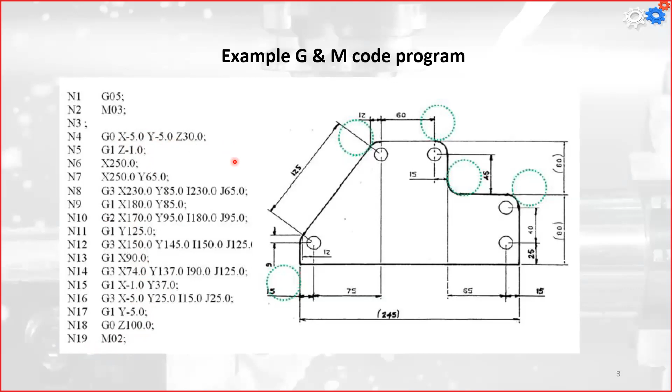While in the case of 3D printing, we do things layer by layer, and thus maybe the same code is going to be repeated multiple times. And that's what we call the canned cycle, especially if all the levels are going to be the same. But sometimes it's also going to have some differentiation between the shapes because we may not have the whole thing moving in the same pattern.

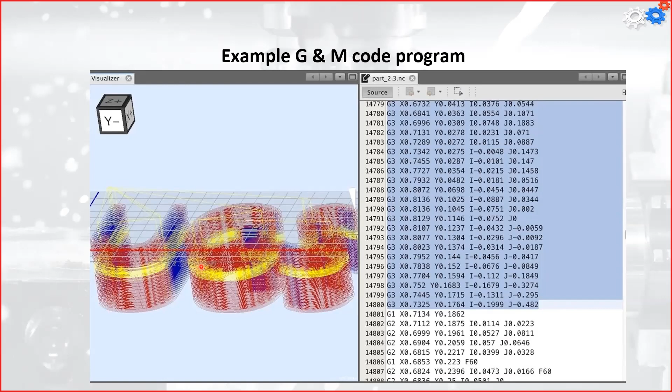Now, creating a numerical control part program. We can do that by manual code writing, and that's what we're going to learn today, and we're going to practice it by Thursday. We need to visualize the machine operation from the drawing of the part.

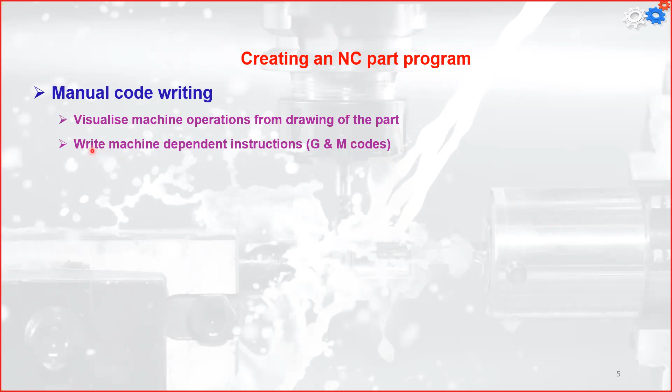So we can either do the part as a 3D part, or if I get to have a physical one and I need to redo it, I will take the dimensions, select a reference point, reference all the points by their location from this reference point as an X, Y, and Z value, and then start to write down my G code manually. So that's writing the machine-dependent instructions by using the G and M code.

You can also use computer-assisted programming. I don't want to explain that to you in too much detail, but this will be high-level languages like APT or EXAPT, compiled into a cutter location file, or CL file. So after writing down the code, we save it as a CL file that will be sent to the machine, and the machine will process it.

Now, the thing with computer-assisted programming: if you ever used a simple programming language like Arduino, for example, you have blocks. And the blocks are about doing a certain operation. So I will import this block, and then I will put P1 and P2, and thus the machine will understand it has to move from P1, which is point number 1, to P2, which is point number 2. And I can also define that this movement is going to be an arc, or a straight line, or just a point going down and up.

So it's mostly going to be something like having already defined things, and making a relationship between these points to get the final shape. If you ever used AutoCAD, it always had this possibility. So I choose a point and I start to move the mouse, and I type LN, which is line, to location XY if I'm in 2D, or XYZ if I'm sketching in 3 dimensions.

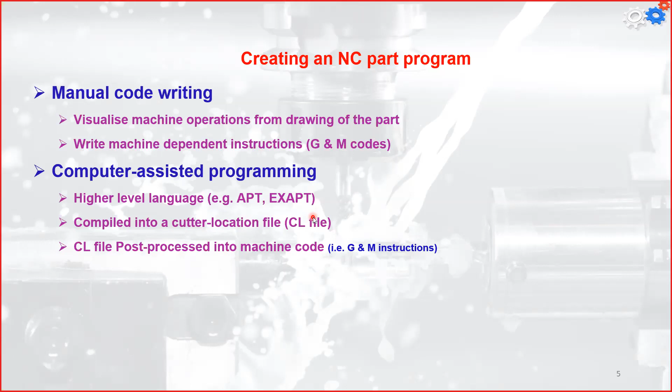The other way is CAD/CAM generated programs, and this is the higher level of writing the G code, and usually it's going to be done by

Do you still have me on Teams? I think I lost Teams. Just give me 1 second. I'm sorry, I lost Teams. I just want to check up with them. Just to start it up. Okay, sorry, Teams people, I lost you. Okay, anyway, I'm going to share the screen again and continue with that. Okay, so I am sorry, but the program just restarted itself. Sorry for that, and we're going to continue with the slide.

Okay, so as I told you, the last thing is going to be CAD/CAM. From the name, we're going to use computer-aided design. When I say CAD, most people will understand that we are going to have the geometry sketched by SolidWorks, or by NX, or by AutoCAD. Now, the term CAD is computer-aided design, which is going to be, of course,

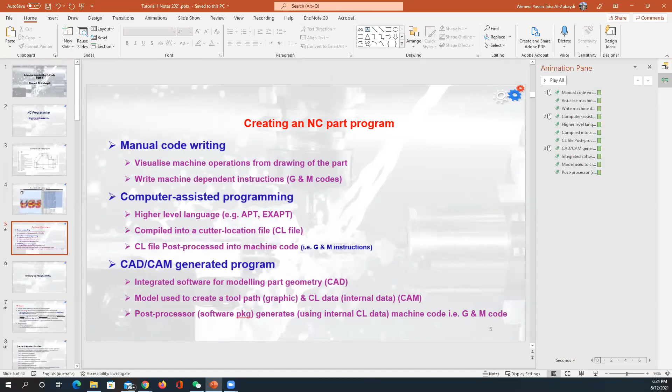Okay, so we go back once again. We said that we do have the CAD/CAM as the last process. What we're going to learn in this session is we're going to sketch the part using SolidWorks, and then we're going to use SolidCAM, which is software available for UTS students, to generate the G-code.

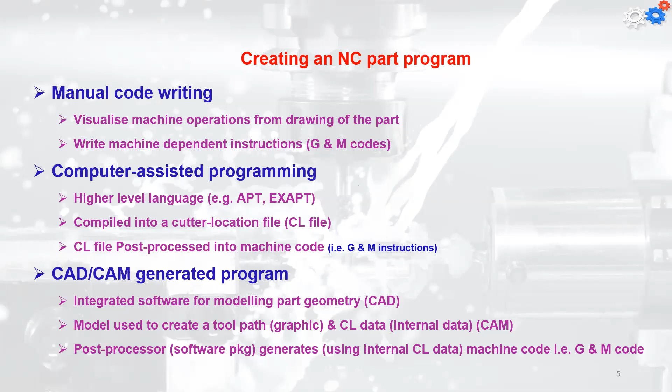Also, I went through the internet and I found something like FreeCAD/CAM, which is a good software, but I'm going to learn how to use it and make a tutorial for you on how to use it. For the first two parts, we're going to use manual G-code writing, because the second one requires a special software that I don't have, and I couldn't find a free copy for it.

We go now with the manual numerical programming. First, we're going to learn about the G-code. I think I can use the camera now. Yeah, now it's much better, you can see me and hear me.

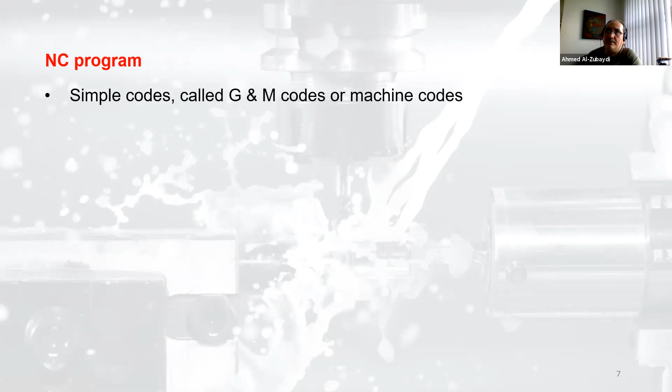Okay, so for numerical programming, we are going to use the simple codes, which are called the G and M codes, or the machine codes. Both names are correct. We're going to run the part program to create the components or the parts of the machine.

What we need to do is just write down lines, multiple lines. Each line is going to send the cutting tool center, in the case of milling, or the tip, in the case of turning, to a new location. It's always required to write down the location of the next point. We don't have to mention the location of the recent point.

The movement of the cutting tool center or tip is called the tool path, and the tool path is defined by the line of code, or block. The line code begins with the block number, defined by N, followed by the G code or M code.

The G code indicates the geometric motion of the tool, which is why it's called the G code. The M code is miscellaneous, or the machine function, like turn on the machine, turn off the machine, or hold the machine, for example to change the tool.

The feed rate usually isn't at the beginning of the code. We set the feed rate with the F code: write down F, then follow it with a number indicating the feed rate in millimeters per minute.

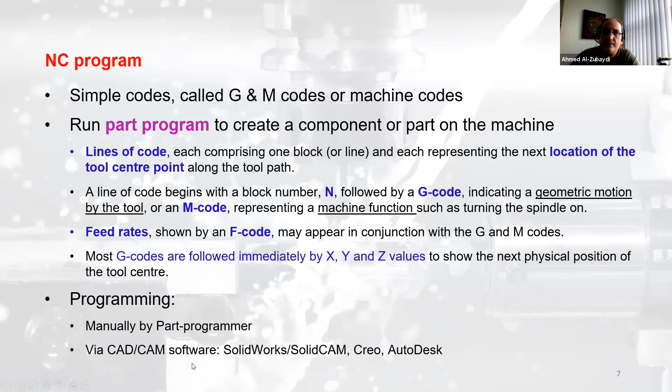The programming can be done manually by the part programmer, or via CAD/CAM software like SolidWorks with SolidCAM, Creo, or Autodesk.

The standard G and M codes number about 90, but you can write a full code using just 5 of them. Well, I want to say 5 or 6, because you can easily remember that.

Everything else, like turning the coolant on or off, or making the offset automatically instead of finding it manually, can be done with codes like G41 and G42. These can be learned individually.

What I'm going to teach you in this session is the basic 6 codes. From these basic 6, you can extend your knowledge, and I'll give you once again the link later for the CNC simulator, which can help you develop your knowledge with G coding.

So we have only a few basic G codes that can do the whole work. Apart from these basic G codes, all the other codes are simply a combination of the basic codes written in shorthand manners, like subroutines or canned cycles.

A subroutine is when I'm doing the main work, then I stop for a while and go do another thing, like make a pocket or a spherical shape, then return back to do the face cutting or profile cutting.

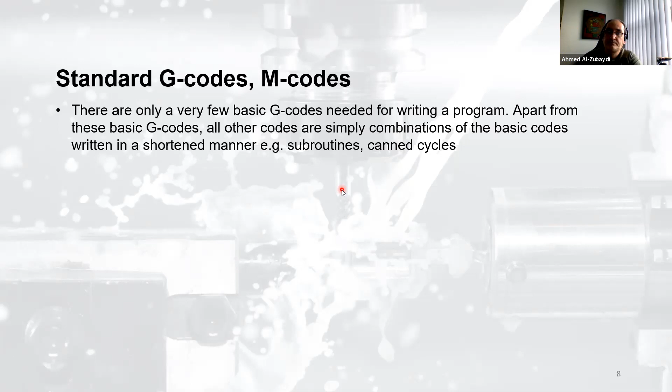The codes we need to learn in general include G90, which sets the absolute coordinates for the machine. By default, all machines are set up as G90. The other one is G91, which sets the incremental coordinates instead.

Now, of course, you remember what absolute coordinates and incremental coordinates are, but we'll give you a brief reminder in the next slides. G00 is a rapid move from one point to another in a straight line without doing any work. For example, if my cutting tool is at this position, I'd like to take it to this position straight forward without doing any work.

No contact between the cutting tool and the work part. Just say G00, X, Y, and Z. When I say X, then I keep the sign for a while—that means you need to put a figure after the X.

The G01 is going to be a straight line move at the set feed rate. That means, once again, it's going to be a straight cut, straight movement, but this time we're going to have contact between the cutting tool and the work part. So we are doing machining.

The G02 and G03 are for cutting an arc shape. The difference between G02 and G03 is that G02 is cutting in the clockwise direction, while G03 is cutting in the counterclockwise direction.

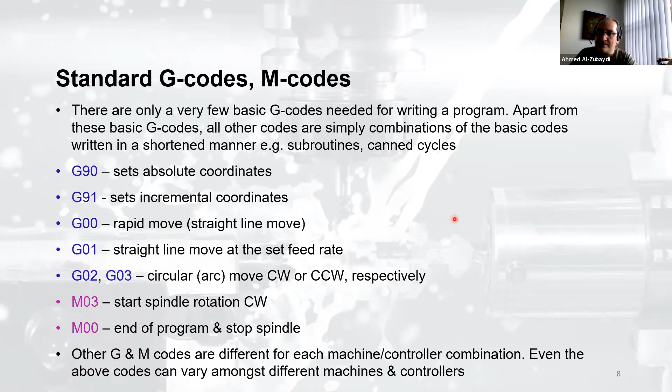Some of the codes mentioned later are G20 and G21, which define what unit you're going to use—either SI units or IP units. Usually all the machines around the world are set up with G21, using SI units. In the United States, they're still using G20, which uses inches and feet.

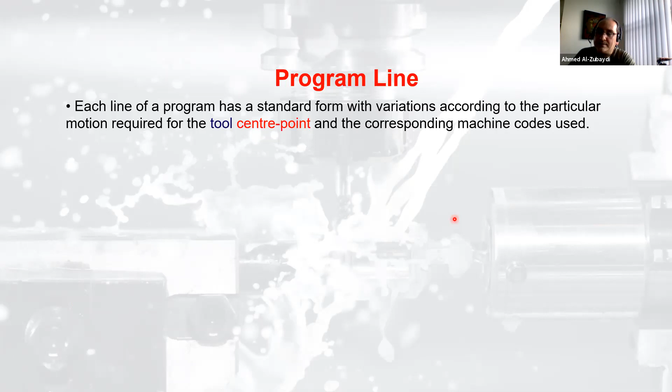For the program line: each line of the program has a standard form with variation according to the particular motion required by the tool center point, in the case of milling, or the tip in the case of the turning operation. Every line, which we call the block, has first the block or sequence number. This is very important because when the machine gives you an error, it will mention the line number, say line 15, and you'll be able to trace it directly. If you forgot to put that, it's going to be very hard to find when you try to fix it on the machine.

Followed by G90, which sets the absolute coordinates. G00 goes in a rapid movement in a straight line to X equal to 100, Y equal to 50 millimeters, Z equal to -1, and F equal to 100. Now you can see that we mentioned the X location, the Y location, and the Z location. Of course, we need a reference point, and this reference point is called the datum point—we're going to talk about this one very soon.

Here's another example: N30, G03, going to X equal to -20, Y equal to 30, I is 10, and J is 2. That was an old method to define the center of the arc when cutting an arc or circle, by defining the I and J location.

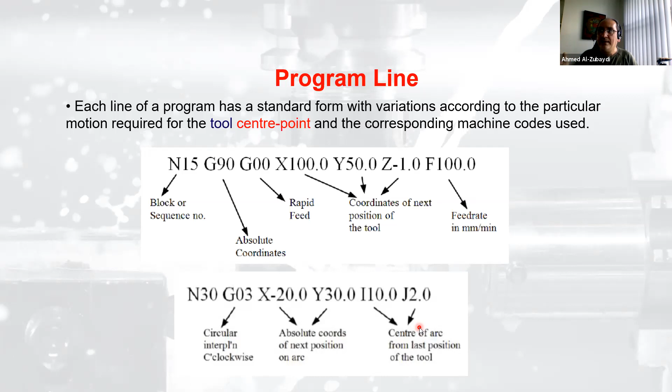And of course, according to coordination, we have I, J, K—I for the X, J for the Y, and K for the Z. This will be the location of the center in this line, as shown in front of you, from the recent point. That means the arc I'm going to sketch will have its stop point, the spin of the cutting tool center, where X is equal to -20, Y is equal to 30, and I is shifted in the X direction by 10 millimeters in the positive direction, and J is shifted above by 2 millimeters.

The program zero, the datum point, without it you cannot find the correct movement of the cutting tool center. It's something like if you would like to drive your car using a map, you need to have a reference point. If you're going to program your car, for example a self-driven car, you set a location, recent location, and the next location, and then the navigator will calculate all the data for you.

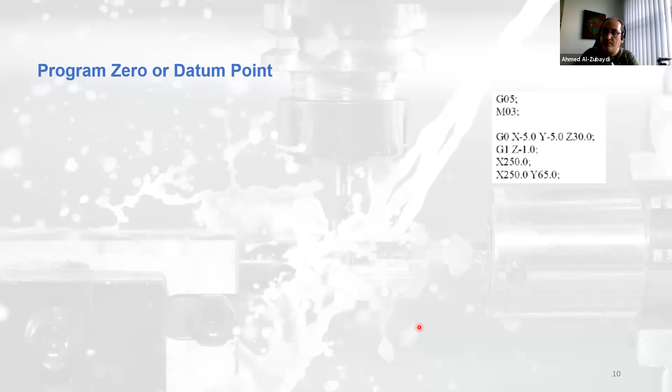Now for the zero datum point, how are you going to tell where's the X, the Y, and the Z? You need to have a reference point. Where to put this reference point? Usually it's going to be on the top surface of the work part, and usually we choose the lower bottom left corner of the work part face.

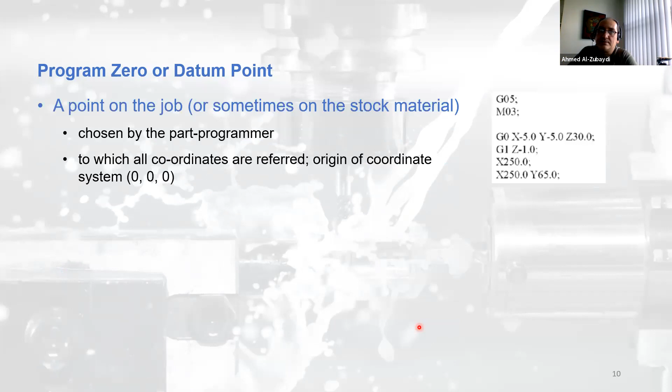So it's a point on the job, or on the stock material, chosen by the part programmer, to which all the coordinates are referred. The origin of the system is going to be 0, 0, 0. This location cannot be included in the program, but it's implied by the coordinates of the toolpath.

Usually, if I'm going to have a milling operation, I'm going to hold the part with a vise. Now, I need to be sure that the part is at an upper level. So the vise is going to be a little bit lower than the top face, and my datum point is going to be at this corner. When I take a look at it from the face, it's going to be here. So the vise is not going to be in contact with this point. It's at the top level, and this will be considered the 0, 0, 0 point.

Below the surface is going to be negative Z. The longest side of the CNC machine in the milling operation is going to be the X-axis, and the third hand is going to be the Y-axis.

In the case of turning, usually we're going to have the zero point either here at the end face. For the circle, this will be the X-axis going up, and this will be the Z-axis. The axis of rotation is always the Z-axis. The next axis is going to be the X, and if I'm going to have a 3-axis machine, the last axis is going to be the Y.

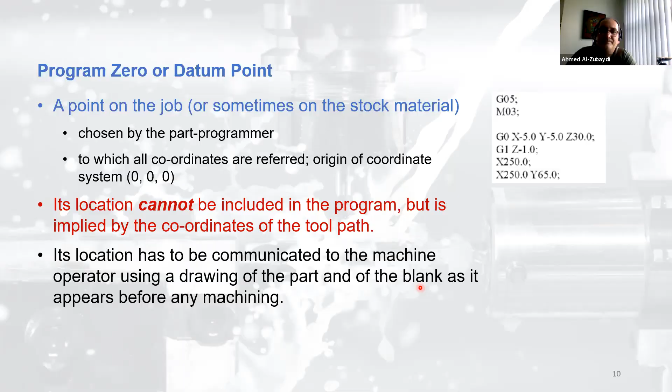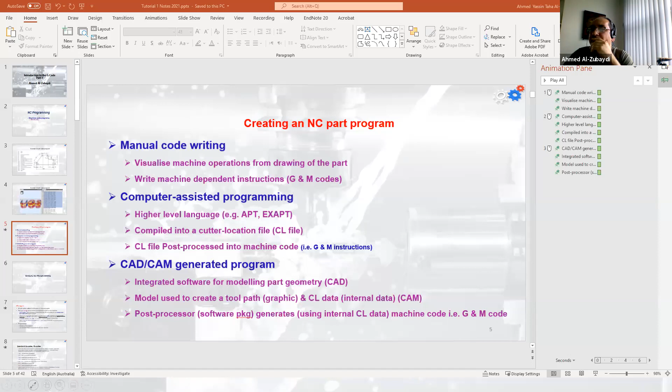So just to be sure that we're not going to have any contact between the cutting tool and the machine table, we're going to have the program zero, most often for the milling operation, to be at the top surface, and at the bottom left-hand corner of the finished job.

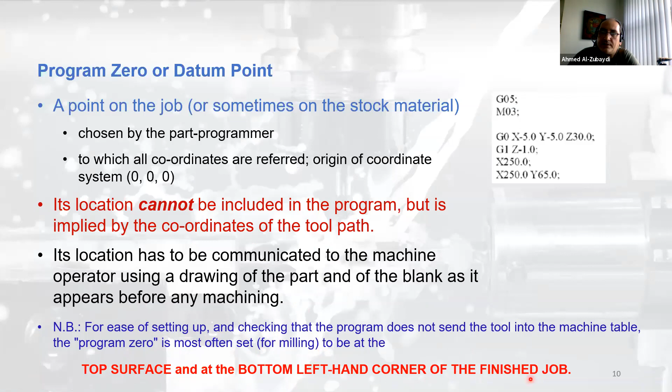So a possible location for the datum point, it can be here, it can be here, and it can be here. But usually we adopt this one. This is the easiest one, and that's what most people agreed on.

Oh, by the way, because the computer is playing up with me, I don't know. Okay, what I'm going to do is share the main screen as long as we have a problem with that. Share screen, I'm going to share the same screen. This one down.

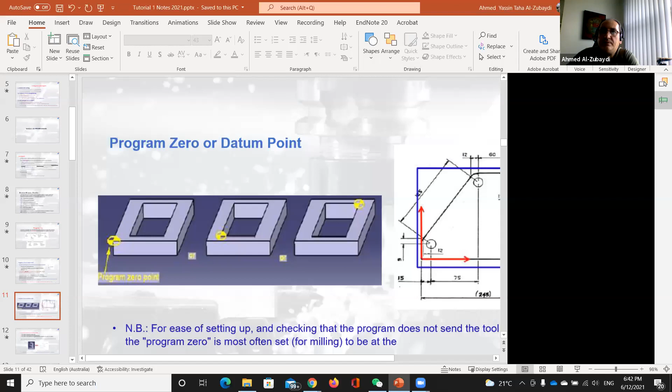Okay, I think this will be more convenient.

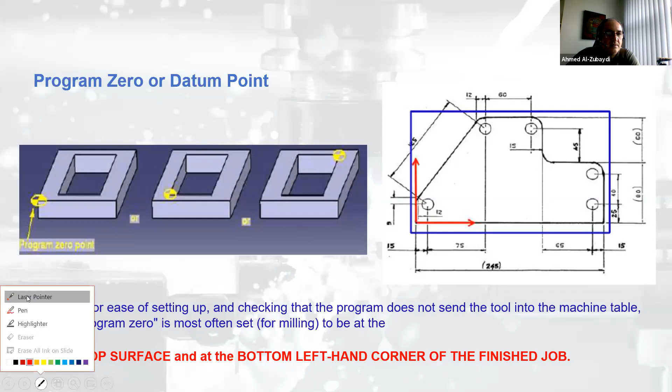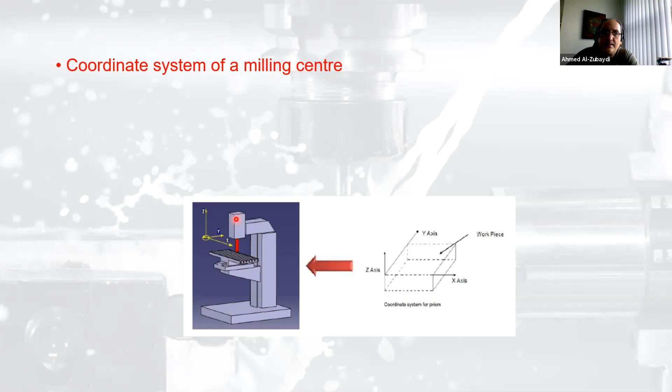Now we go once again to the coordinate system of the milling center. Whenever you see a milling machine, remember that the longest side of the table is the x-axis, the shortest side is the y-axis, and the rotation axis of the cutting tool is the z-axis.

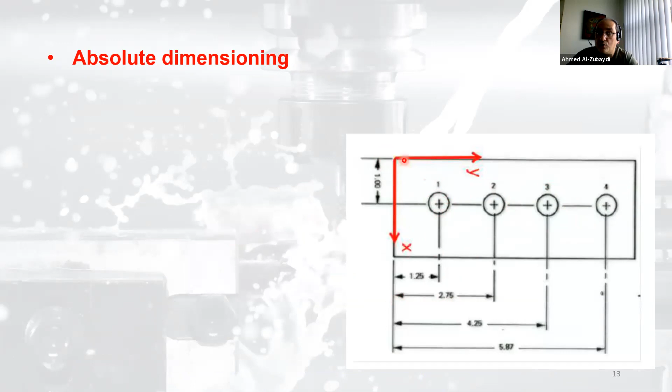In the case of absolute dimensioning, all the points are referenced to the datum point. So points 1, 2, 3, and 4 all have locations defined according to the 0,0 point. When absolute coordinates are used, all positions are always relative to the 0 position, and usually this is programmed by setting the G90 code at the beginning. So I write G90 at the beginning, and then when I write the X and Y, the machine understands I'm referring to the 0,0 point defined on the machine.

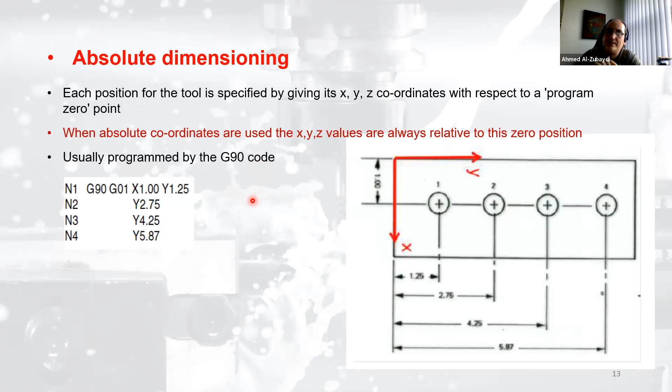The other way is by using incremental, or what we call chain dimensioning. This is very useful in drilling operations, because we can simply define every next point relative to the most recent point. Usually we need to write down G91. Why is it not preferable to use G90 and G91 for beginners? Because you may forget to change it back to G90 when you finish with G91.

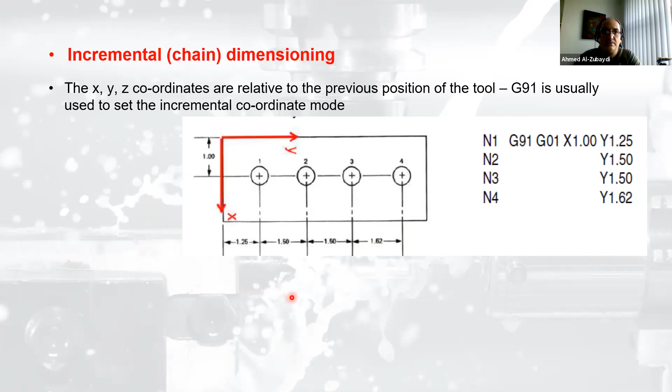Now, this doesn't actually work on all machines, and me and the students learned a way to do it manually or by using CAD/CAM, and this solves the problem a lot.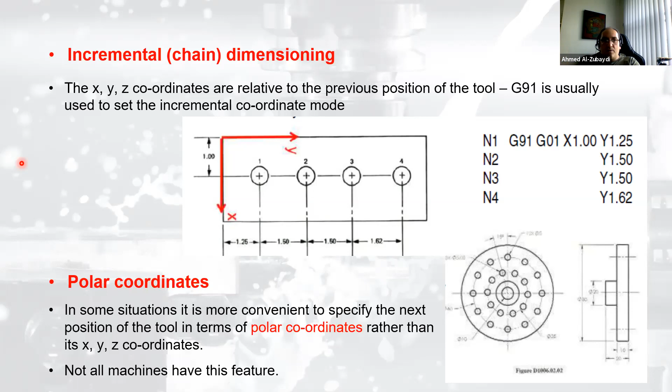Now, control statements other than G code don't involve any tool movement, so they don't have to do anything with coordinates. For example, we have M03, which turns the spindle on. We have the F code, which sets the feed rate, like F200, meaning the feed rate is 200 millimeters per minute.

Just to remind you, the feed rate in milling is the linear movement of the cutting tool, or the speed of cutting. It's definitely different for the turning operation, because there the feed rate is how many millimeters you move the cutting tool per revolution per minute for the part.

We have G05, which is pause or dwell for a given time, usually used when we change the cutting tool. We have G25, which calls a subroutine, like changing the cutting tool to do a different operation like drilling, then going back to milling again.

We have the geometry or preparatory system statements, the G codes like G0, G01, G02, G03, which are all modal and don't need to be repeated in consecutive blocks. For example, if I do G01 and the next line also requires G01, I can save time and not type it again. Most geometry codes require coordinates, usually in Cartesian form using X, Y, and Z in the same block, indicating the next position of the tool, and this is always a reference to the datum point in the case of absolute coordination.

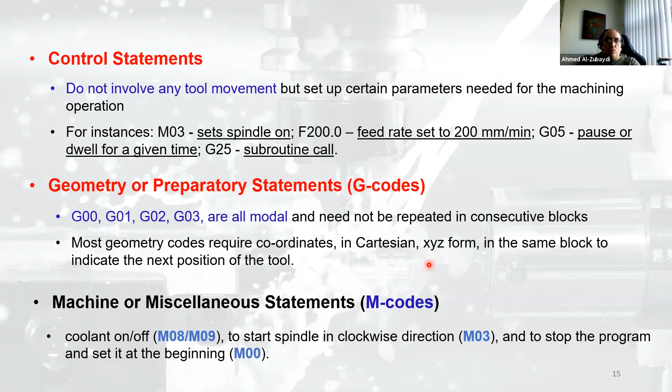The first example is how we do linear cutting. This is a piece of wood, and I would like to cut a straight slot inside it, starting from point A, which is here, and ending at point B, which is here. Now you can see that this is my datum point. I'm looking at the part from the top, at the lower left corner, and I set up my datum point here.

Now, this is the side view, section AA. You can see that the depth of the slot is going to be 5 millimeters downward. So what I need to move is the center of the cutting tool from here to here. The width of the slot is decided by the diameter of the cutting tool. If my cutting tool has a diameter of 5 millimeters, the width between these two lines is going to be 5 millimeters. If my cutting tool is 10, the width is going to be 10, and so on.

So point A is 15 millimeters in Y, 30 millimeters in X. Of course, I need to say it the other way: 30 millimeters X, 15 millimeters Y, and minus 5 millimeters in Z. Why minus 5? Because the top surface is 0. When I go downward, it's going to be -5. Downward is negative Z, and upward is positive Z.

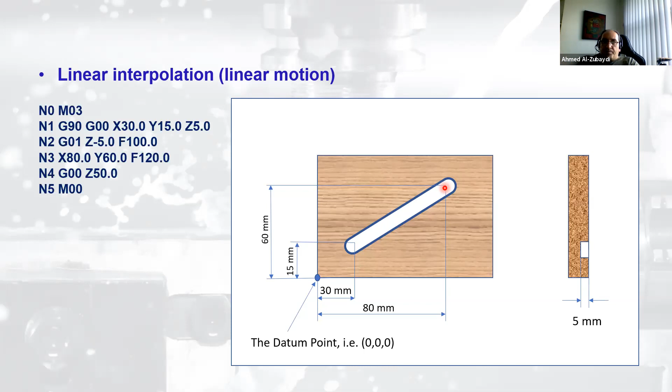So the code is going to be N0, line number 0, M03. That means the spindle starts to work. Line number 1 is G90: the movement is on absolute coordinates. G00 means the cutting tool moves from an undefined location to where X equals 30, Y equals 15, and Z equals 5. So it's above point A. When I say 5, the cutting tool is rotating at the top here. It's not inside the work part; it's above it by 5 millimeters.

Now I need to penetrate the work part to a depth of -5 millimeters. So I write G01 Z equal to -5 using a feed rate of 100 millimeters per minute. Now the cutting tool is inside the work part. Line number 3 moves to the point where X equals 80, Y equals 60, with a feed rate of 120. In this line, the movement is decided by G01, but we didn't write G01 because it was already defined in the previous line, so no need to repeat it. Now I'm at point B.

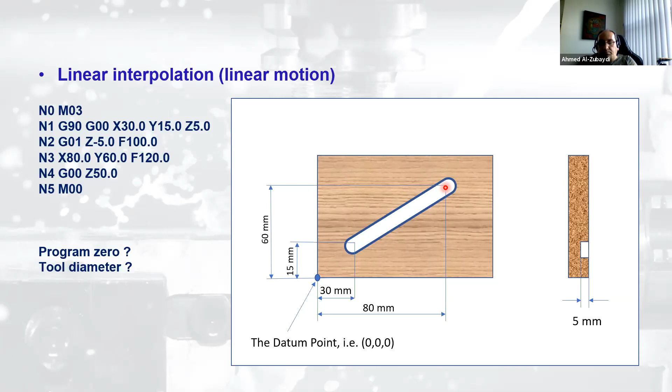Now, in the case of the circular interpolation, like cutting something like the horseshoe here, we are going to use a different code depending on whether we move in the clockwise or counterclockwise direction. So you can see that the first line is going to be the same, M03. I just start the machine. Second line is G0, just go to X equal to 40 and Y equal to 60 at the height of 5 millimeters.

So I brought my cutting tool from anywhere just to stop it at the top of point A here. Now, the next movement is G01. I need to penetrate the part with the cutting tool. G01, to the depth of 10 millimeters, so Z is equal to -10, at the feed rate of 100 millimeters per minute. Now my cutting tool went inside by 10 millimeters depth.

Line number 3: if I would like to go from point 1 to point 2, you can see, for the people looking at the screen, not at my hand, the movement is going to be in the clockwise direction. So in the clockwise direction, we're using the G02. The G02 must be followed by the coordinates of the point I would like the cutting tool to stop at, which is this point. I need to give the X value, which is 15, the Y value, which is 35. The Z is not going to be changed, so I'm going to leave it as it is.

Sorry for that. Well, I have a suggestion. I'm going to restart my computer and come back to you. Don't leave the meeting. Okay, guys? Don't leave the meeting. I'll restart my computer. You got that? Yep. I'm going to restart my computer because I don't know why I have these technical problems. Just give me 1 second. I'll be back.

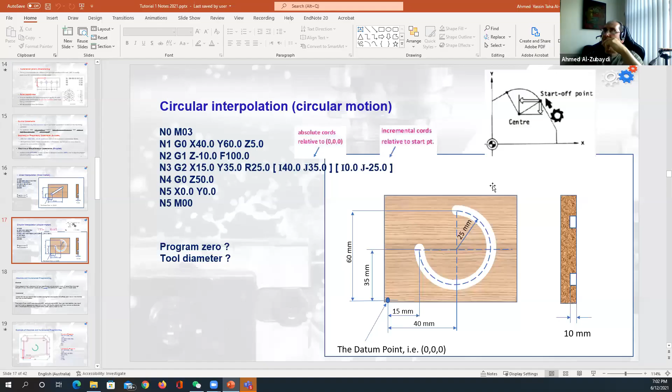I'm sorry. Here we go again. I hope that things are going to be much better this time. Okay, so what happened to the camera? Okay. I hope we're not going to have bad luck this time. Okay, we're going to play with Teams now. I think what happened is that because I was running both at the same time, this caused me a problem. Anyway, we will see.

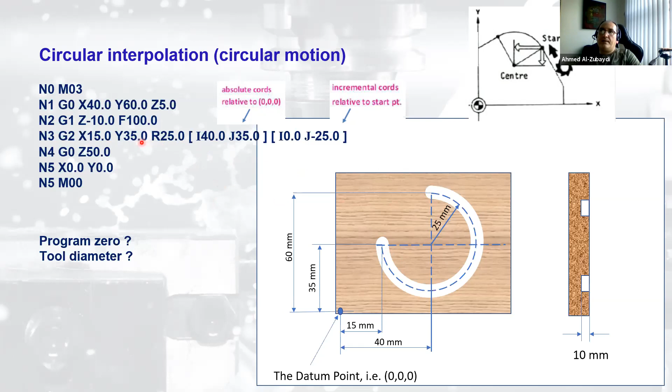Okay, so once again, we go back to the slide. So once again, we said that we can have both ways to write down the G02 or G03, simply by identifying, and this will be for both, the X and the Y for the next position, followed by the R, writing down the radius of the arc I would like to have for the toolpath.

Alternatively, I can define the center, and the machine will simply generate the arc. It's something like when you hold a rope with the pencil at the end at a certain point, and you move it, the radius generated is going to be the length of the rope you have, because simply the center has been decided. So when we reach the next point, we need to simply leave the work part, and that's why we wrote down G00 to the height of 50 millimeters.

Then we move the cutting tool to the position where the X is going to be equal to 0 and the Y is equal to 0. And of course, Z will remain as 50. Then turn off the machine.

Yes, go ahead. Sorry, sir, could you please explain the incremental coordinates again? Okay, for this one, because I stopped at this one last time. Now, when we say incremental, of course, we need to put here that this is G91, to be incremental. And now let's define where's the center from the red dot here, incrementally. You can see that I wrote down that the I is equal to 0 because there's no movement to the left or the right, just below.

So in the x-axis, there's no changes. I is equal to 0. For the J, which is the movement in the y-axis, we're going below this point by 25 millimeters. So we wrote down that the J is equal to minus 25. Clear? Yeah, that makes sense.

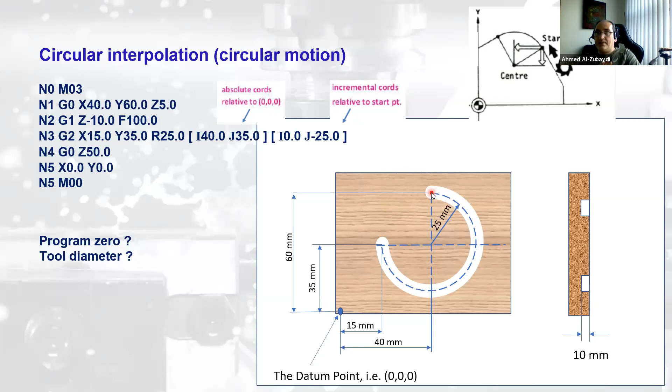So if you've ever seen spiral cuts, for example, like the thread cuts on the milling machine, actually, we need to use the I and the J. And that's what we are going to notice later when we generate the G-code with the CAD/CAM software. So once again, this is just repeating what's the absolute and the incremental programming. In absolute, all the points are defined relative to the datum point, and in incremental, all the locations are defined relative to the recent position.

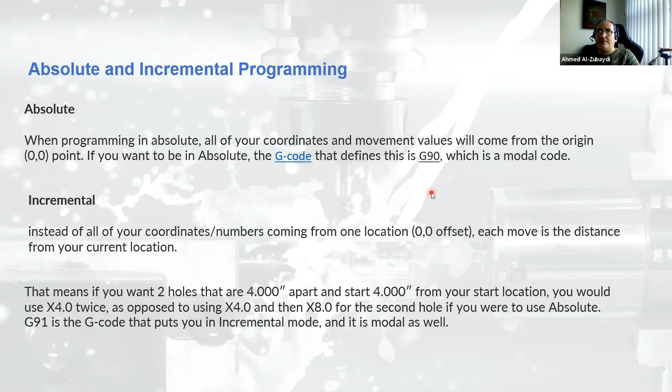Okay, now this is an example for the absolute and incremental programming for the same part. This cutting is what we call profile cutting. You can see that we have two lines here, two colors. We have the brown one and we have the pink one, or the purple one. The purple one is the cut we would like to have, while the brown one is the toolpath. If I would like to do profile cutting, always remember something. We always need to have an offset.

Something like when you stand in the train station, you can see that we have the yellow line, which is at a certain distance from the curb to the train. Now always mind this distance. The distance between these two lines is equal to the radius of your cutting tool. Radius of your cutting tool. Now what we can see here is that we need to have the movement going through the brown line to perform the cut on the purple line.

Analyze that. We move from this point to that point, we need to have G01. From this point to that point, G01. From here to here, it's going to be in the counterclockwise direction, G03. G01, G01, because I know this is a radius shape, but simply I don't want a certain radius; it's going to be the radius of the cutting tool. So G01 only, G01 and G01. If I go the opposite way, the codes are going to be the same. The only difference is at this point, I'm going to have G02 instead of G03.

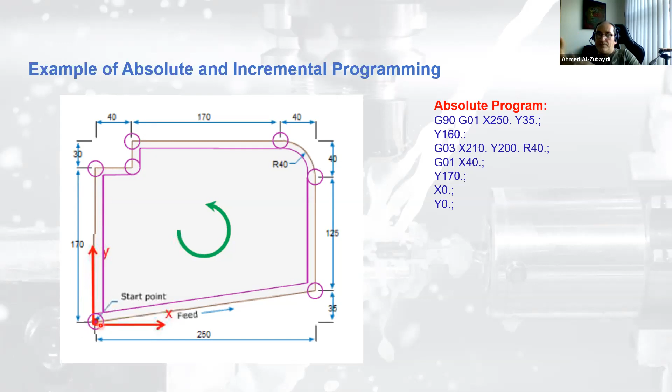Now, have a paper and a pencil and try to exercise by doing that with incremental positioning. Of course, it's going to be the same: we're going to have G01 followed by G01, followed by G03, G01, G01, G01, and G01. Just the points, the locations will be different because they'll be identified from the most recent location.

I will give you an example. This point is going to be moving from here to here by 250 on the X and by 35 on the Y. This will be the same one.

I will give you a second hint: moving from this point to that point is going to be G01, Y 125, because the Y is 125 in the positive direction. Then you can write down the rest.

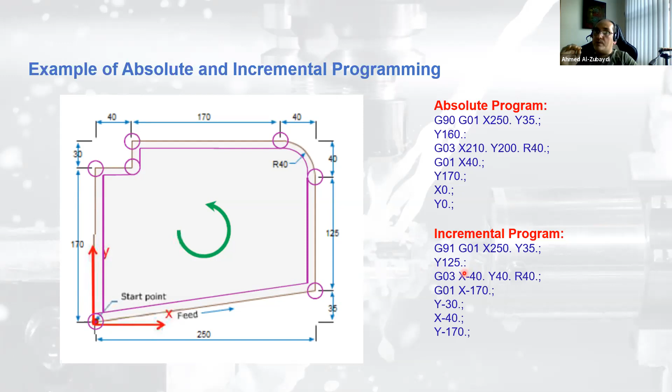Radius compensation is the most important thing. If I'm going to have a cutting tool which is going to have a 10 millimeter diameter, my tool path must be 5 millimeter offset from the cut I would like to have. If my cutting tool is 20, the offset is going to be 10. If my cutting tool is 2 millimeters, the offset is going to be 1.

Now you'll say that there's no cutting tool with 2 millimeters - there are 2 millimeters. We can also use the automatic one, which is the G41 and G42. So I write down the code, which is going to be exactly over the dark line here. But at the beginning of the code, I'll write down G02.

G41, sorry, or G42. G41. If I get to go in the clockwise direction, I'll write down G42, so the center is going to be offset by a certain value over the code going to the right. Okay, if I get to go counterclockwise direction, I will write down G41, and this will be going to the left. So this will be the left offset, this will be the right offset.

Once again, I don't advise you to use it at this moment. We're going to learn about this one later.

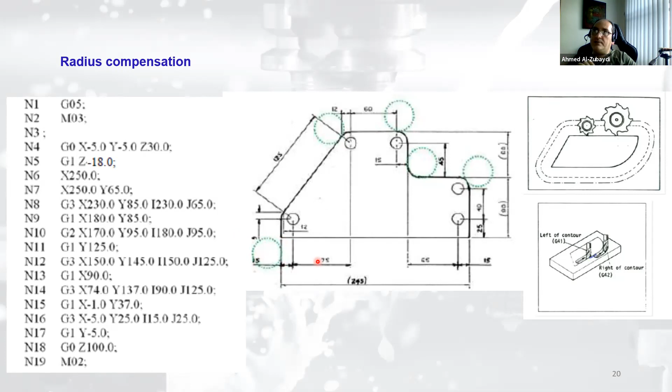In all cases, don't forget that we need to offset. The tool path is always offset from the cutting path by the value of the radius of the cutting tool. So once again, the pink line is the tool path. The black line is the cutting path.

Sorry, there's a question here. Oh no, it's not a question. Yep, I will sketch this line, which is parallel to that line here, and offset by the value of the radius of the cutting tool.

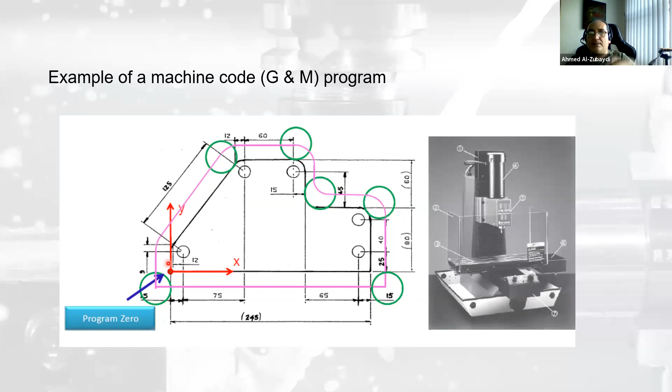Again, to make an arc which is parallel to this arc, and offset by the value of the radius of the cutting tool. And then again, to have intersection points. These points, again, to find their coordinates, then again, to build a relationship between them. Done. That's as easy as possible we can do it.

So tool compensation, we said, always going to be equal to the radius of the cutting tool. We can do it within the program by using G42 if going clockwise direction, G41 if going counterclockwise direction. But I prefer you define or write down the code with the offset you decide.

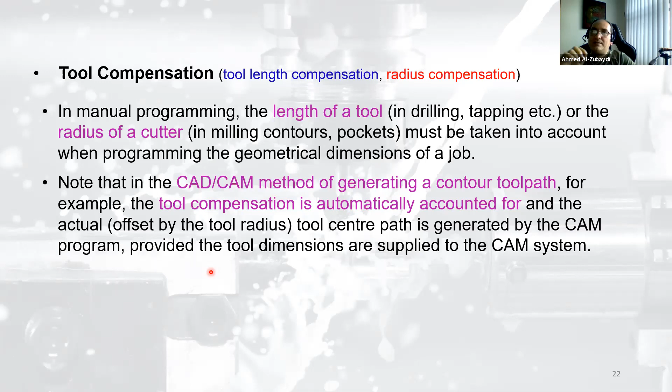So okay, don't make the machine do that, because I notice many students who try to do the work end up either having a smaller part or larger part because they didn't define the points correctly.

Cycle statement is going to be the last thing we're going to cover today. Usually when we do face milling, we said that we have a certain depth for the cutting tool to penetrate inside the work part. This will depend on the type of cutting tool material you are using, the material of the part you are cutting, and the cutting speed.

If I'm going to cut wood, I can go directly for 4 millimeters. If I would like to cut steel, I can go maximum for 2.5 millimeters. Another thing is the cutting tool: if I use a carbide insert, I can go further than with high-speed steel. Another thing is the quality of work I would like to have. If I'm doing rough cutting, I don't care about the surface roughness we achieve after cutting, so I can go for a deeper cut. If I would like finish cutting, I need to go for a shallow cut.

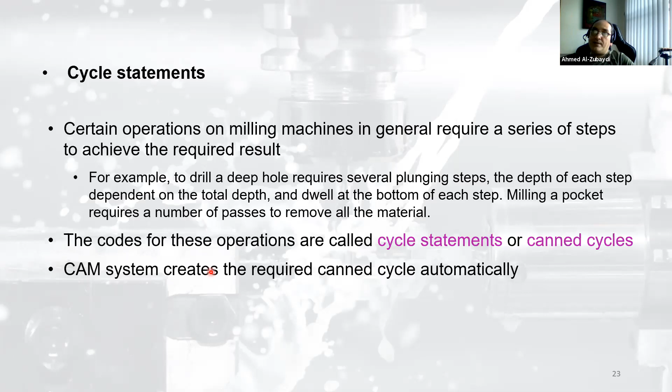If I need to do multiple cuts for the same pattern or tool path, I don't need to write the code multiple times. I simply define that this is a cycle statement, or the canned cycle, where the system is going to be repeated multiple times. We have a G code for it. I only need to define how many times it's repeated and what the depth will be each time. So if I need a total depth of 5, I can do 5 divided by 3 times, giving me about 1.5 or 1.6, and set it to be repeated 3 times.